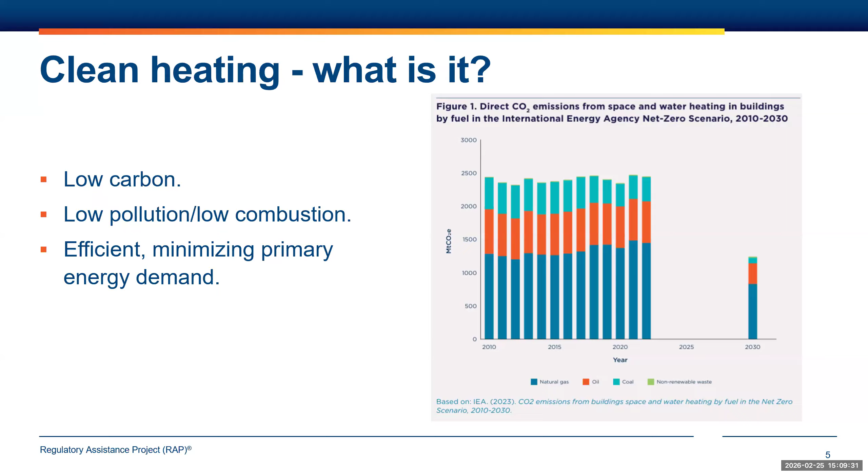And that's really a big part of how we get to a clean energy future. At the same time, heat pumps obviously rely on electricity to run. So I'll come back to the performance of heat pumps and how they do actually produce heat.

But we have seen clean electricity technologies, which are obviously vital for cleaning up the electricity grid, fall rapidly in terms of price of generation, really with onshore wind and solar being cheaper than fossil fuel alternatives on a levelized cost basis. And in theory, and I'm very hopeful that actually we can get to a point where clean heating is also significantly cheaper than the fossil fuel heating it is replacing. And we might not be there at the moment, but continued technological innovation is taking us in that direction.

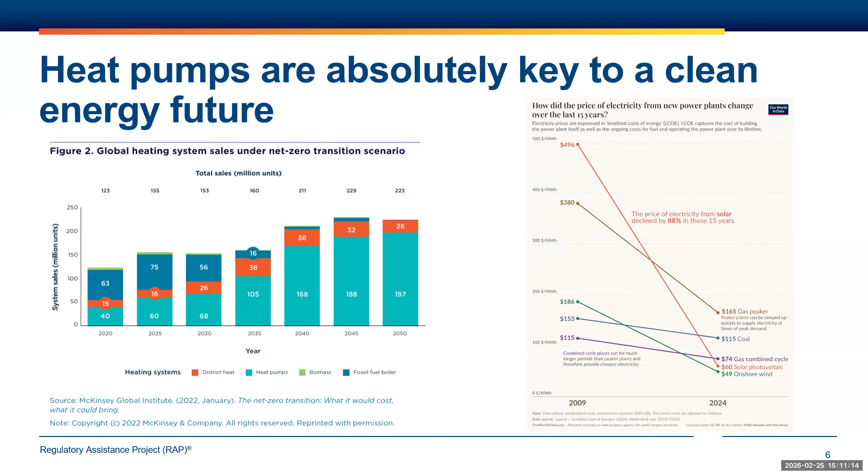But typically, you can put 1 unit of electricity into a heat pump and it will work its magic, although it's not really magic, it's just thermodynamics, and it will produce or spit out 3 or 4 units of heat. That therefore means that you've got a very, very efficient way of producing heat, which has a significantly low resource requirement in terms of primary energy demand.

So heat pumps really are an excellent way of reducing primary energy demand. And for countries heavily reliant on imports and worried about energy security, they're a really, really good way of securing up energy supplies because they need so much less energy in the first place.

But despite this efficiency, which is very significant, electricity is significantly more expensive than gas or other fossil fuels used for heating typically. And so while electricity can be more expensive because the heat pumps are so efficient, it can't be many, many times more expensive. And that ratio is really, really important. And I'll come back to that in a minute. But basically, we don't want to see any ratios of electricity to fossil fuel prices above 3, because that will erode the efficiency benefits of heat pumps.

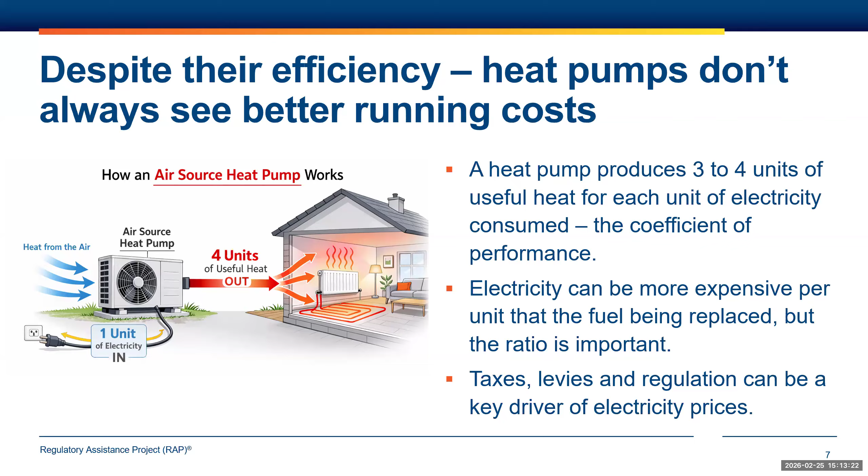So pricing is one very, very important part of delivering heat pumps at scale. And it's worth pointing out, I think, at this stage that it's just one part of the puzzle for the deployment of clean heat and heat pumps. And actually, mixes of policy measures are needed to drive the heat pump market and the clean heating market at a speed and at a rate and in a way that matches net zero and climate change and energy security goals.

Policymakers also need to think about the availability of financial support for building owners. That might be things like subsidies, it could be finance. That's because heat pumps often, but not always, do cost more than the fossil fuel systems they're replacing. Some heat pumps can be significantly cheaper, notably air-to-air heat pumps, but not suited to all building types.

And the final pillar is regulation. So governments also need to consider things like end dates, market drivers, and planning to make sure that the buildings market, homeowners, and the heating market knows what's coming and knows where to invest. Together, all of those things need to be coordinated, need to be communicated, but you need all of those things to drive clean heating at the rate that we need.

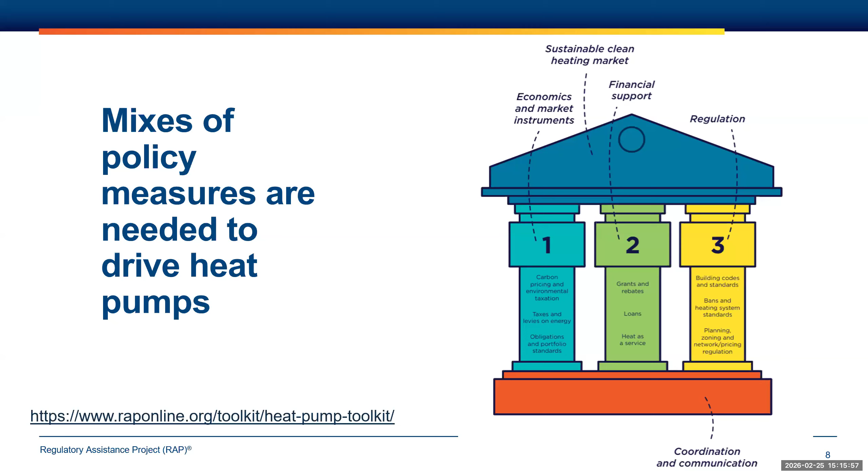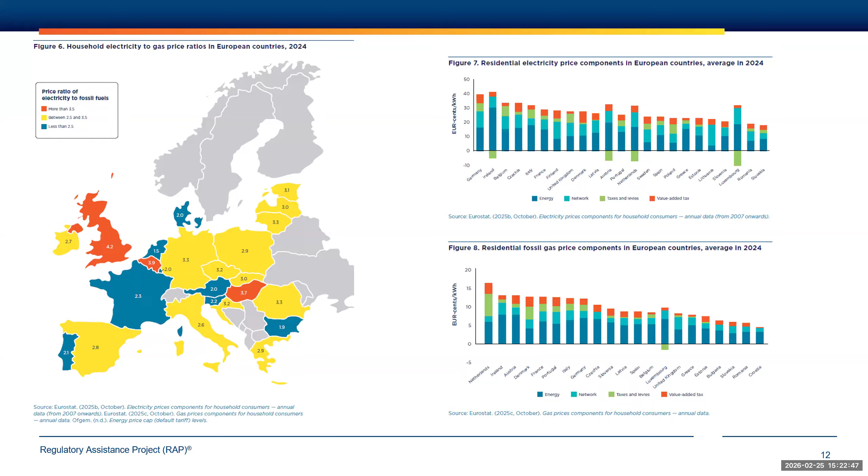But the point here really is that there is a huge amount of potential for governments to make efforts here on pricing if they really want to. And I'll give some examples of how that can be done, but firstly talk about some other regions.

And so really across China, the price ratio issue is not significant when it comes to electrification of heating. In many ways, it actually makes a lot of sense for building owners to electrify their heating if they're able to. Although local development planning means that might be beyond the ability of the household. It might be a city-based regime, for example.

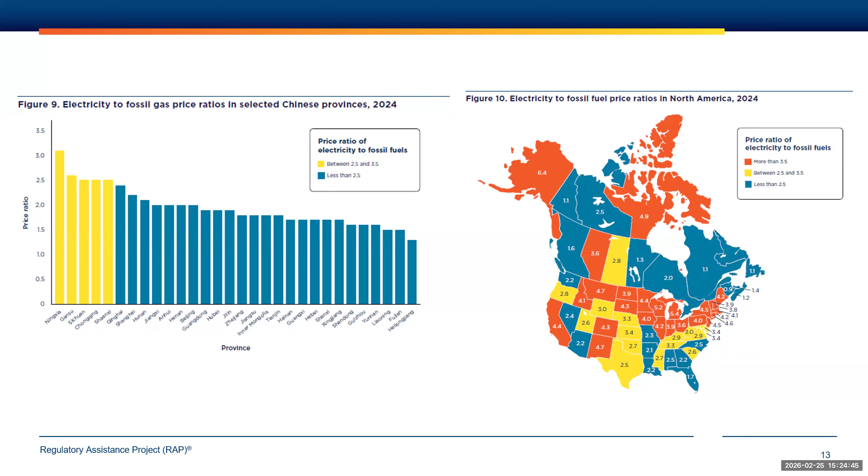So on to what you can do and what has been done. Countries are already making progress to reduce these price ratios, partly to reduce the burden on households in general, but partly to also support the electrification of the economy and of the building stock. So Germany made the decision to remove a significant chunk of levies which had been placed on electricity. That's the EEG policy, for those of you familiar with electricity policy in Germany. And they shifted that from bills into the public budget.

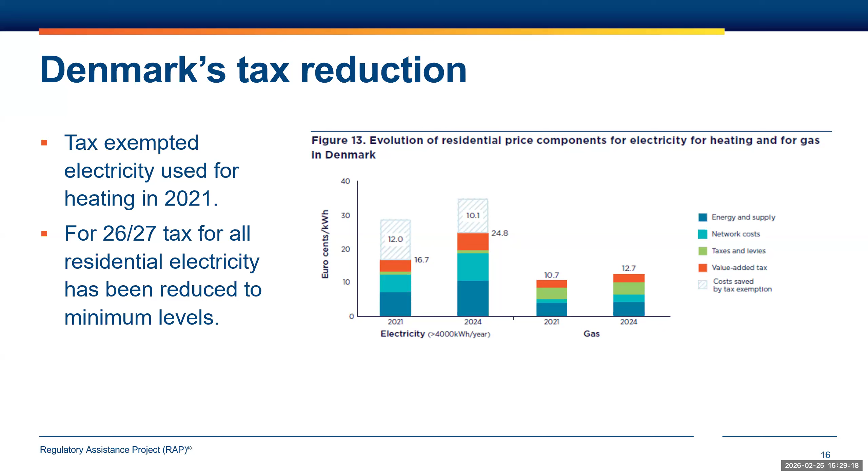Taxes on electricity in Denmark have been quite high, and gas, I should say, so that made a significant chunk in electricity bills, leading to significantly lower heat pump running costs in Denmark. And so this has always been an example that we've been able to point to as very good practice for a few years. It's worth noting that in light of concerns over electricity prices in Denmark, all residential electricity use has actually been reduced to minimum tax levels for the current year and for next year too. So while Denmark made very early progress, specifically on heat pumps, this tax exemption has been extended to cover all electricity use in Denmark.

So Sweden took a different approach. Sweden has had a carbon tax on fuels since the early 1990s, and this has been significantly increased over the years to the point now where I think it's around 120 euros per ton of carbon, probably one of the highest carbon taxes in the world. But this has been part of a suite of functions which have led to heat pumps growing as the core heating solution in Sweden.

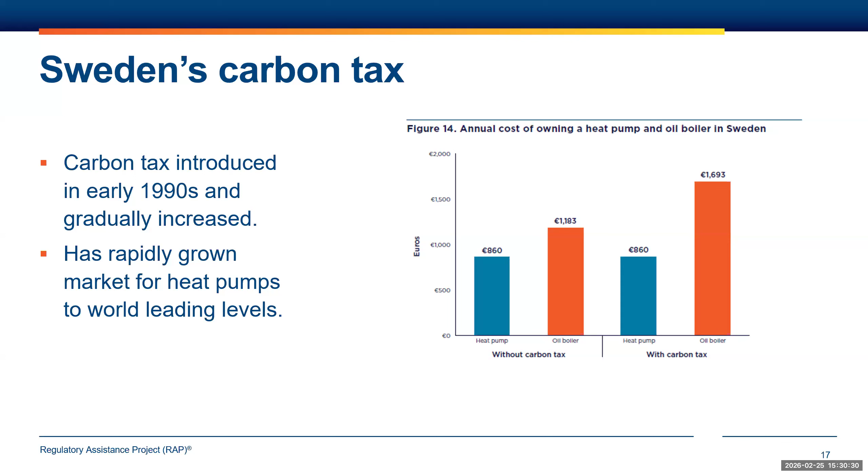And the graph here compares a heat pump, total ownership and running costs in blue. So that's the cost of the heat pump annualized over a year, and the running costs compared to an oil heating system in red, which includes the running costs and an annualized cost for the oil heating system. And you can just see what a difference the carbon tax makes in terms of costs. Basically, it's half the cost of an oil heating system to have a heat pump over its lifetime. So that is the impact that you can have if you use carbon taxes effectively, amongst other measures.

And then in the Netherlands, the Dutch have taken a full sort of rebalancing approach, whereby electricity has become cheaper and gas has become more expensive. And so rather than simply bringing one down to the other, both have been leveled to try and meet each other. And that's resulted in this price ratio in the Netherlands being around 1.5, which is certainly very low by European standards. That has been achieved by increasing taxes on gas.

There has been a huge national concern over gas in the Netherlands because it's primarily imported from people that the Dutch don't want to be importing from. There have been earthquakes too associated with gas extraction. And so there has been a national move away from gas. At the same time that the gas taxes have been increased, electricity taxes were decreased too, to really strengthen that differential in terms of prices.

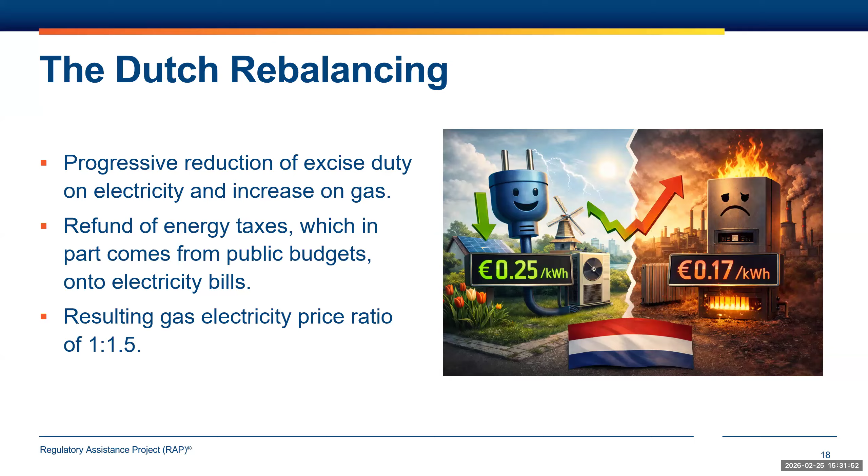And actually, more recently, this has been made slightly more equitable as there are rebates given to every household now, to make sure that the impact isn't too severe for building owners. But a very, very significant price intervention in the Netherlands, which really makes electrification absolutely the most cost-effective option for households. So that's all of the case studies that I wanted to talk about. And there's more details of those in the report.

Just a few words on the broader impacts of this and around equity and making sure this is done fairly. We always think that however taxes and levies are applied and how they're changed, they should of course be efficient, but they should also be very considered. You can have significant social impacts by altering energy bills, and that obviously needs to be taken into account by policymakers. These price rebalancing measures also need to be considered in the context of a broader set of measures supporting clean heating. That could be associated with what grants are available, for example, for heat pumps or for solar panels or batteries or efficiency, or wider heat planning, for example.

There are also various other policy measures that governments can do to manage these social costs, actually. So it could be that you might manage prices in a way that the Netherlands have done and do a full rebalancing, but then provide support through other means, maybe through social security or through tax rebates, as they have done. And finally, it's very possible to bring down running costs of heat pump systems with a broader set of technologies as well now.

And so where we see the best running cost potential is where heat pumps are combined with solar panels and with batteries and potentially smart tariffs, smart use. And so a combination of levy and tax reform, as well as deployment of other measures, can be very, very impactful in terms of people's bills. We have done as an organisation at RAP plenty of work on making electricity cheaper, and I've provided a link there to our priority actions for making electricity cheaper.

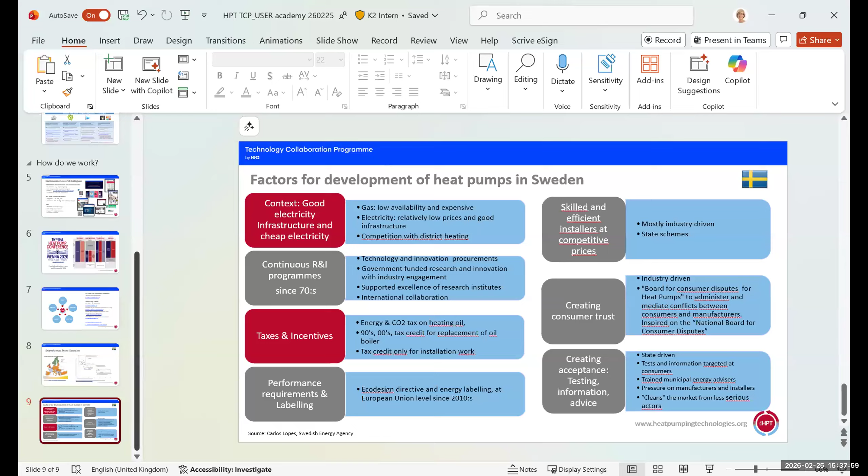And now, do I need to swap or is it okay? If you just go into presentation mode, I think you just tried and it didn't quite work. Yeah, does it work now? Perfect. Yeah, yes, thank you very much.

I am Caroline Haglund Stignor, and I'm working for the Heat Pump Centre, which is hosted by RISE in Sweden. It's the Program Office and Communication Center for the Technology Collaboration Program on Heat Pumping Technologies. I will just give brief information about this, since you have signed up for this webinar. I think you might be a bit interested in heat pumps.

This TCP has been going on for a really long time, started already in 1978. Like other TCPs, it's an international framework for cooperation, a network for different actors working within the field of heat pumping technologies to exchange knowledge and experience, and also to contribute to technology improvements by performing a lot of research, demonstration and development projects. At present, we have 20 member countries around the world in America, Europe, and Asia. You can see them all listed here.

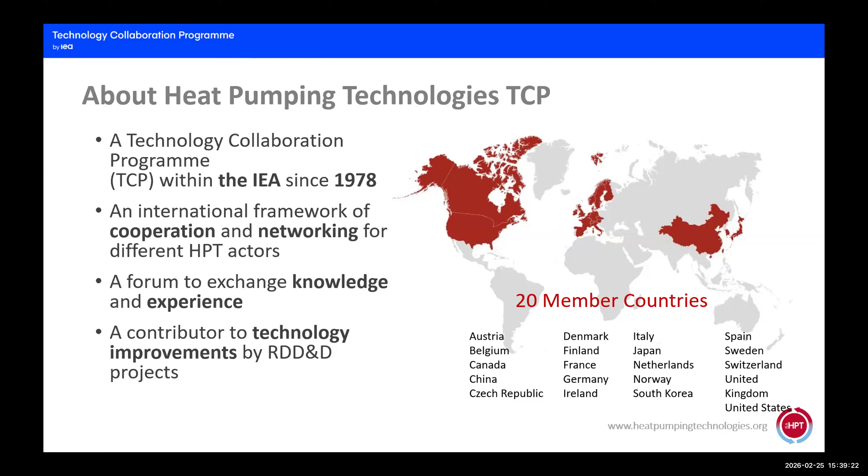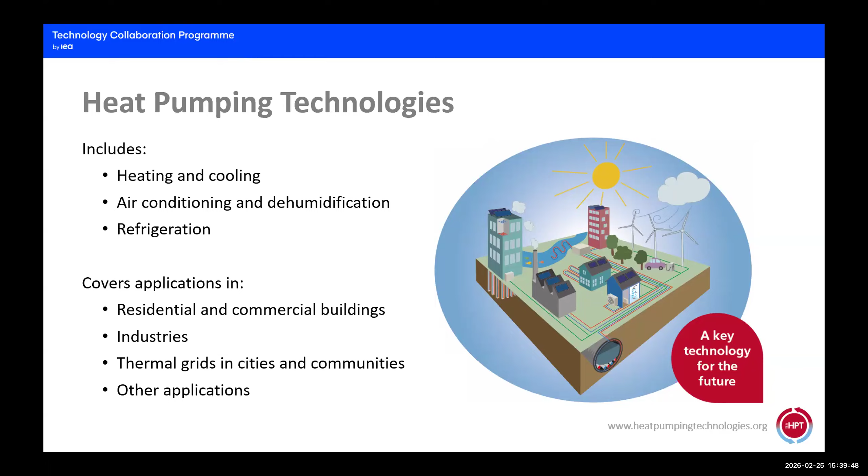When we talk about heat pumping technologies, we include those that work for heating and cooling, for air conditioning and dehumidification, and also for refrigeration, and we cover applications in residential and commercial buildings, industries, thermal grids in cities and communities, and also other types of applications like the transport sector, for example.

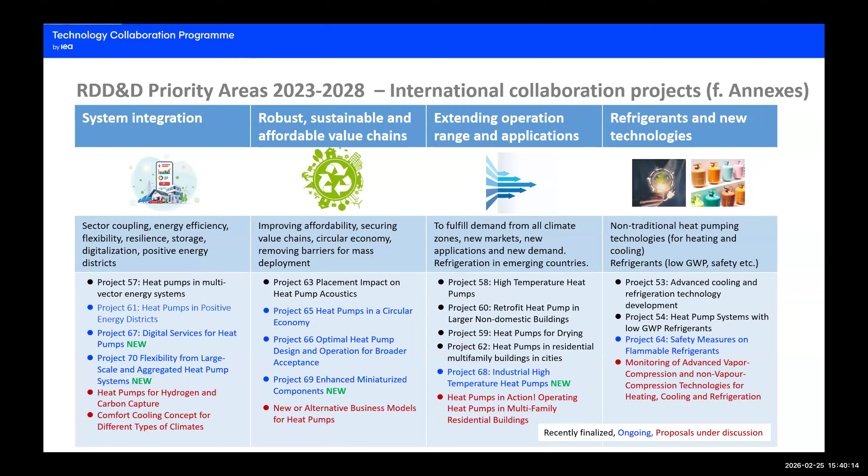So of course, the largest thing we do with the TCP is these international collaboration projects, but we also work a lot with communication and dialogue. We publish the reports from the projects, and we publish a magazine and a digital newsletter. We run a website with a lot of information. It's recently been updated and it includes introductory information about the technology as well as deep dives. And of course, we are active on LinkedIn and WeChat.

Every third year, we organize an international conference, and the next one will actually take place in Vienna in May, and I will come back to that. Then we do a lot of other things like organizing different meetings, workshops, webinars, and we provide support and review to IEA publications and so on.

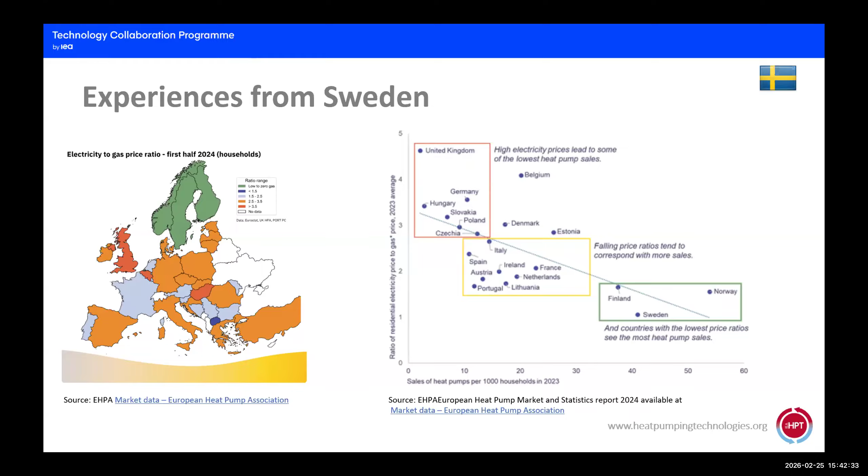I will finally share some reflections and experiences from Sweden. I'm from Sweden, and you can see on this chart the ratio of the electricity price to gas and sales of heat pumps per household. You can see that in Sweden we are quite high here, and we also have a really low ratio here. This was one of the factors in how we managed this rollout of heat pumps and phasing out fossil fuels for heating. But it was also combined with a lot of other policy measures.

The rationale was a good electricity infrastructure and relatively cheap electricity. But there was also competition with district heating and green district heating, and this made it necessary to manufacture really cost-efficient technology as well.

Policies also worked with continuous research and innovation programs. And of course, in Europe, we have the ecodesign and energy labeling regulation to label the technology. We worked to have skilled and efficient installers at competitive prices, and also worked a lot with different measures to create consumer trust and acceptance for the technology. So yes, some reflections here. Thank you very much.

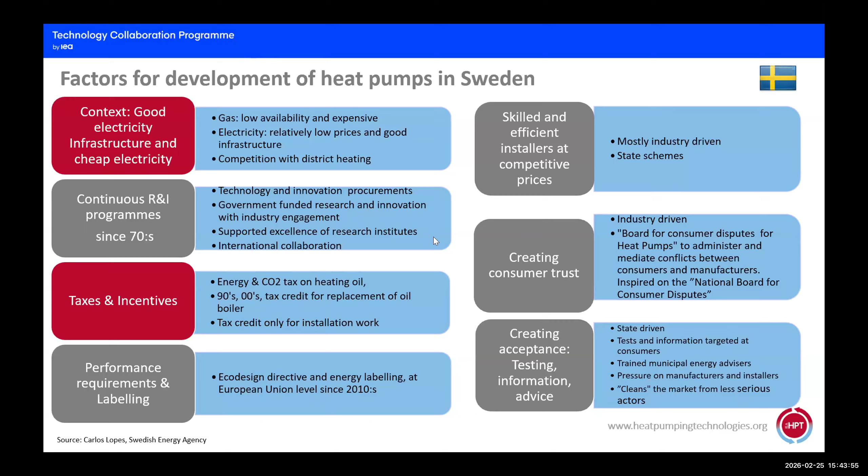Thank you, Caroline. It's great to have the Heat Pumping Technologies TCP in the room with us today. Last summer we had a great joint workshop in Stockholm with the Heat Pumping Technologies TCP, and we heard the Swedish story about heat pump take-up. I was actually very taken by some of those measures on the right-hand side of the slide you just showed, which are a bit less well known than the classic story around the carbon tax, particularly around building consumer trust and the publication of test results, which especially in the early days of heat pumps would have been super important. So thanks very much, Caroline.